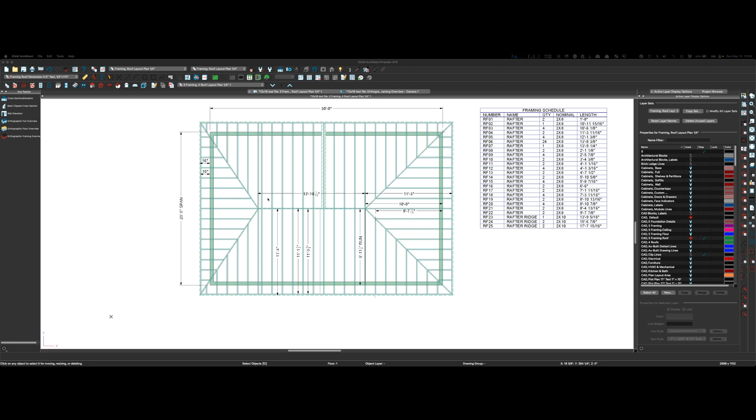So, my good friend Larry sent me a text this morning and said it would probably be better if we could look at this in a section view so we could see what's going on. And I agree. I'm looking at this. That's not to the right spot. This is, Chief is telling me that.

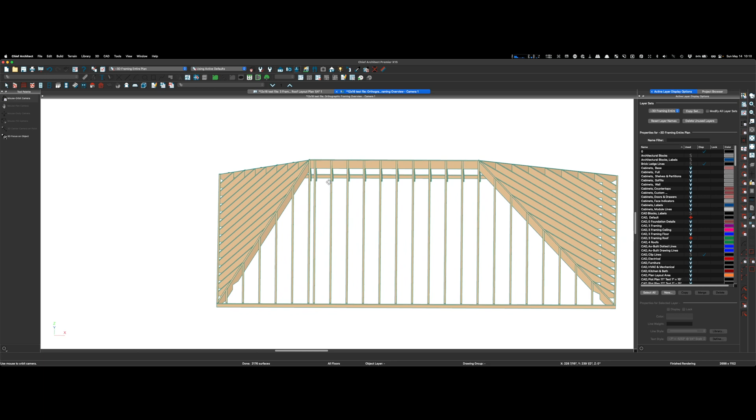Okay. So, what I did was, I did a section view in Chief, and it only follows the lines, so I need a modified section view. But this works, and we can kind of see what's going on. They've pulled the ridge back. All of these are aiming for that one point, but for this to work, you'd have to put a bevel on your ridge, and nobody frames like this.

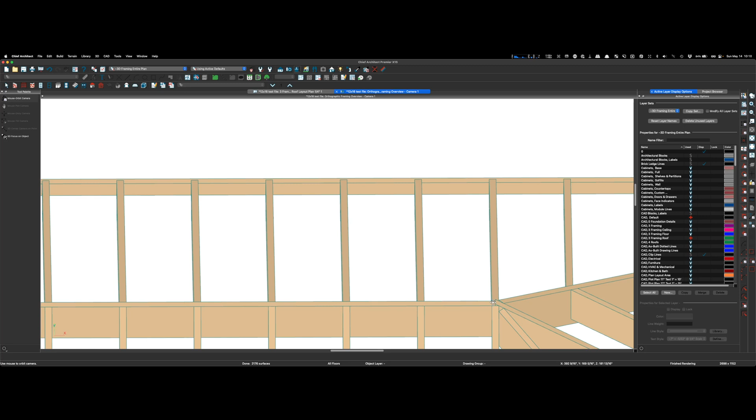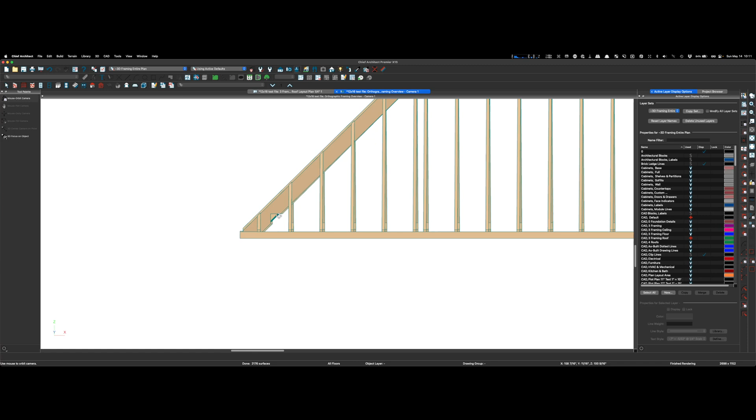This ridge needs to come out to the right-hand side of these two common rafters, and then that would clip this extension, this high point off. And I'll show you what a section looks like in Chief. Oh, the other thing is there's no bird's mouth on here except at the hip. See how the hip went up, and that's where it's supposed to go. But it seems like right there, you would notch that out, that little bit right there. You would notch that out of every rafter on the 12-12 side, but it's not doing that.

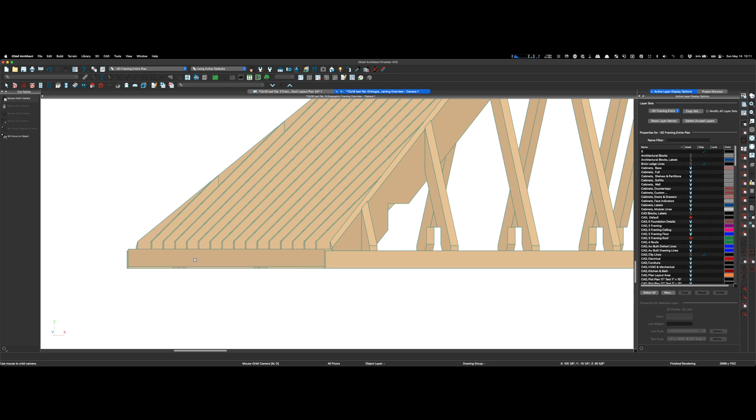And even, oh, I know what it is. So the reason why the 2x8s don't line up is because Chief also considers their overhang to be over the fascia. And that's another thing that's not standard. Everything is dimensioned over framing. And then you add the little accoutrement to the outside. But we're going to help them because Chief's pretty amazing. I just want it to be cut sheet worthy. Yeah, I can't do this in AutoCAD. I could probably do this in SketchUp if I knew that, but I'm not a SketchUp guy.

So enough of looking at Chief. We're going to do this one last thing. We're going to go here. Back clipped cross section. And I'm going to just go straight through all this. Okay. Oh, it's got, okay, has a foundation. That's crazy. That's what's going on. You know what? I don't want that causing me any problems. So I want to go to delete objects. And I want to delete foundations.

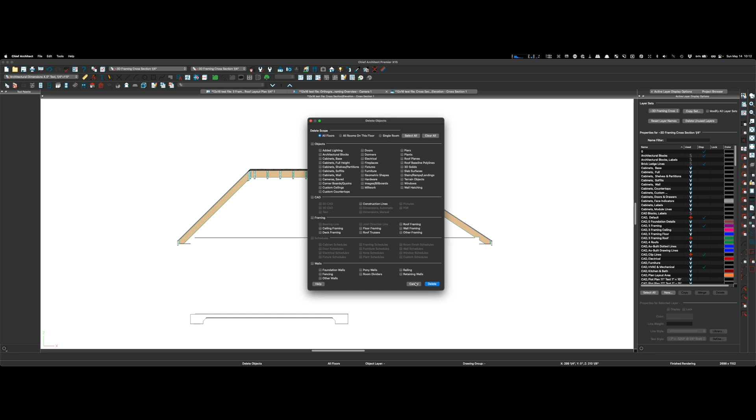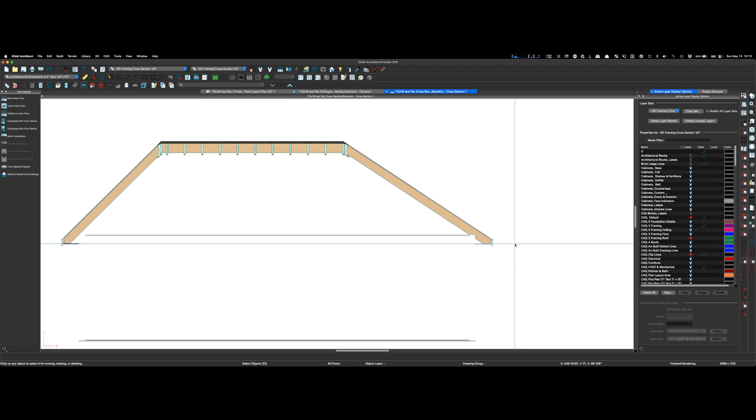Is there even a thing? I'm reading. I guess that's not going to be a thing. We're going to have to go here. And I don't want to delete. There, I want to delete the foundation. Okay. Boom. All right. Very good. See how the soffit lines up? Almost. Yeah. I'm in the middle of the soffit on the left, and I'm on the top of the soffit on the right. So that's another micro glitch. This doesn't really help me.

Well, that was crazy. I had done a bunch of talking, and evidently, either by pressing Z or whatever, it caused OBS to stop recording. I was just going to make the transition from Chief Architect to AutoCAD.

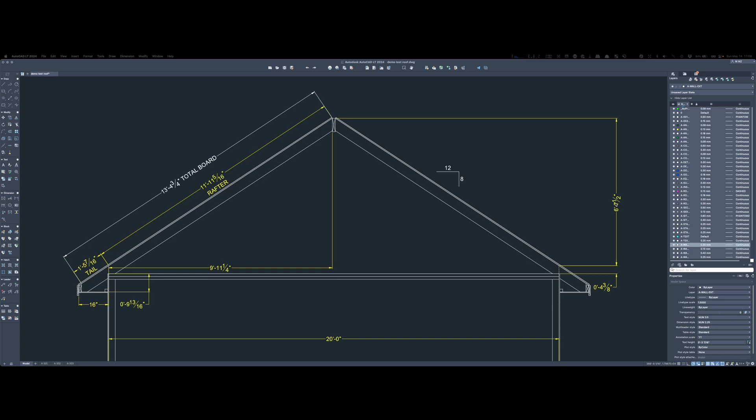And I'm going to try and do this same thing. I'm going to zoom in over here. I'm going to hit the letter Z and see what happens. It was paused. So if I'm here and I hit the letter Z, okay, so I've determined what's going on. When I hit the letter Z in AutoCAD to zoom, it causes the shortcut key to activate in OBS, which is pause. So that's lame.

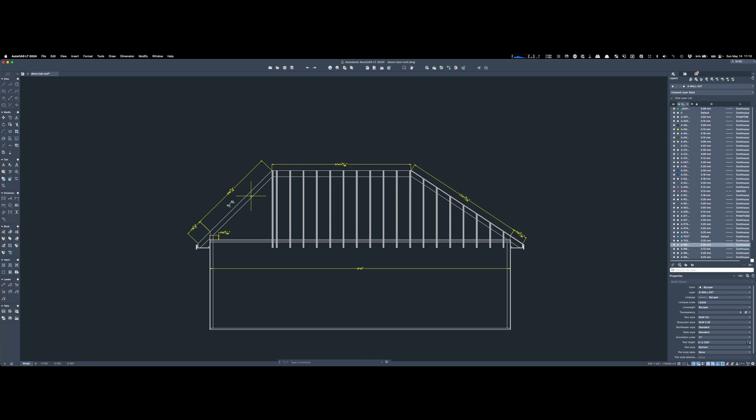I need to find the zoom tool as a tool. Well, I'll just scroll in. Oh, hey, look, it's still set up. Yay. Escape. We'll just scroll. That tells me I got to go into OBS and change its shortcut keys because I can't have that.

That totally ruined everything. So here's the 8/12 side. This is the end common, and it's the same length as the main commons. And here's what the ridge should be. Not 13.9 and whatever Chief said. Here's the rafter length for the 12/12 side and the tail length for the 12/12 side, so that the 16-inch overhang is not only the same 16-inch, but it's also at the same elevation. You have to raise the steeper side by that much.

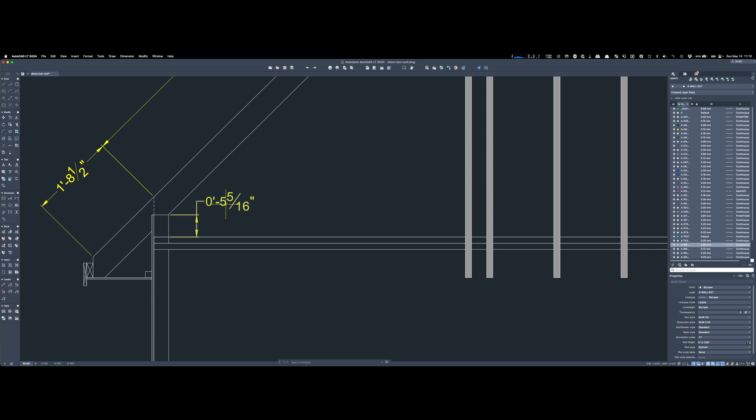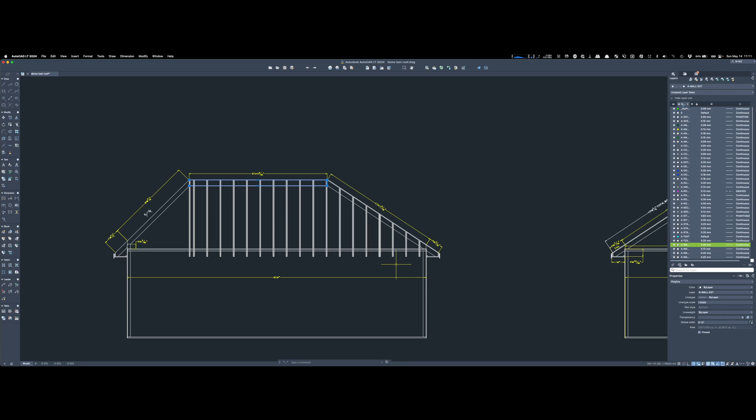And that's part of where that spreadsheet came from the previous video. It's all going to get encapsulated to where you'll navigate by ridge. You'll start with ridge A, you'll put in all the data, you'll print that page, then you go to ridge B and you put in that data and print that page. And you should have everything you need, except stuff like floating hips and floating valleys. But those are easy enough. I'll show how that works.

So we're going to zoom in, let you guys see this. This is the 30-foot section. When I'm framing, I would always, if there's 3 sides that are all the same pitch, like on the right, it's 8, 8, and 8, then my first common would be at the end of that ridge, and then I would work my way to the left, and I would have a close layout on this end, because this is a totally different pitch.

And then if you really want to be high speed, I mean, you don't have to be, but you can figure out how to take this layout and go over 16 inches and 16, so that when you're running your plywood, the end of the ridge means nothing. All these are on 16-inch layouts all the way down your jacks. Now, I don't have that set up in my calculator that way, because I always start from where the hip starts and I work my way down on center. So this would be a transition point where you'd be cutting plywood back and forth.

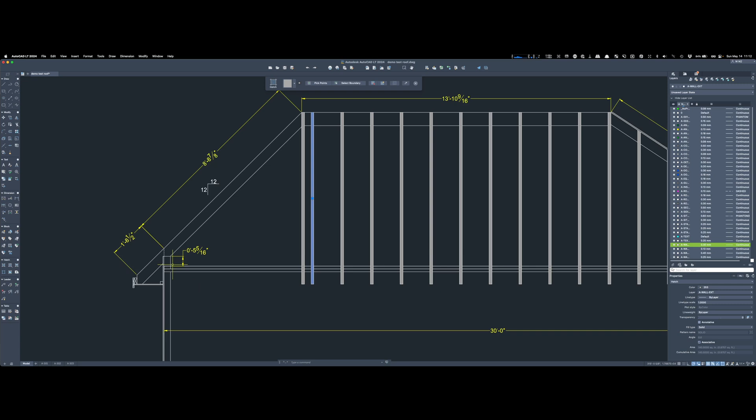But I'm sure there's a way I could mathematically figure that. If I knew what this length was right here, which I should know, then I could enter that and it would cause this to be 16 over here. I'd much rather do that. Like if I'm on site, I would rather have somebody pull the first measurement, come over 16, make a mark, pull this length, and then from here just subtract increments off, just so that I'm cutting less plywood. I'd rather use full sheets, no cuts, till I absolutely have to.

What else? I think that's it. I'm going to try to combine these 2 videos so that it's just one. And I don't really have anything of value to say other than if we can get Chief to get this level of specificity, then we'll have cut sheets without having to do anything. That would be really cool.

So, all right. I think the first one that I didn't record was better, but hey, man, c'est la vie dans Grandville. Boom.